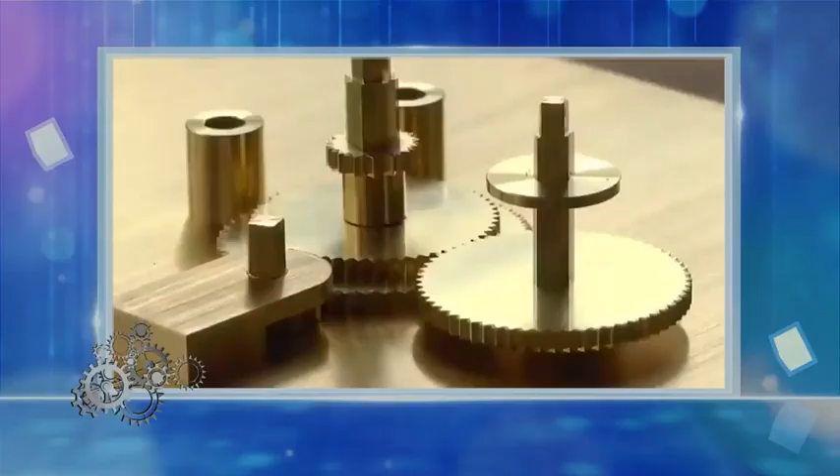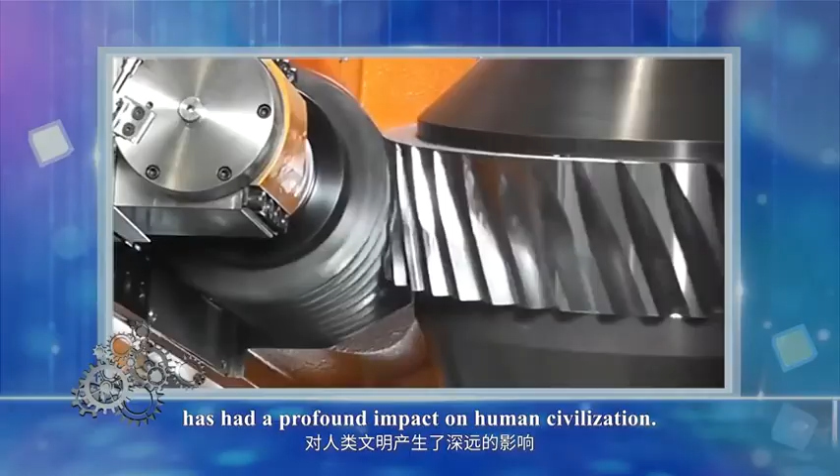Gears are one of the great inventions of humanity. The development of gear technology has had a profound impact on human civilization. The robotic arm on the core module of the China space station is a good helper for astronauts to work. This robotic arm is the most intelligent, difficult, and complex space intelligent manufacturing system in China.

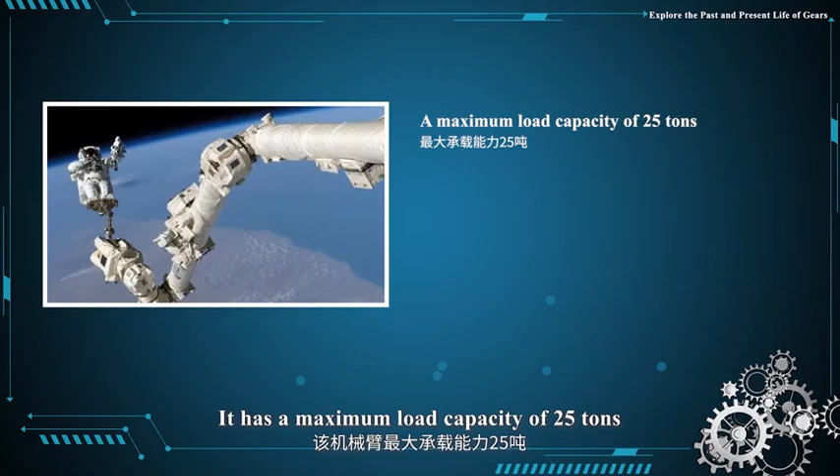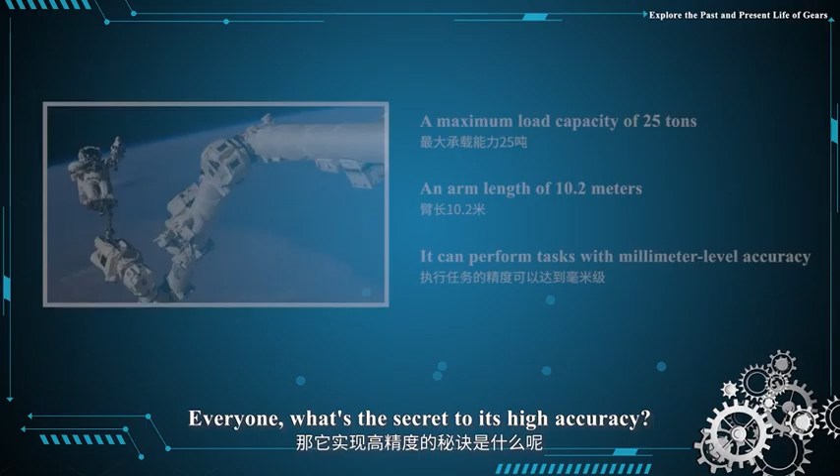What about the load capacity and motion accuracy of the robotic arm? That's a great question. It has a maximum load capacity of 25 tons and an arm length of 10.2 meters, but it can perform tasks with millimeter level accuracy. Everyone, what's the secret of its high accuracy? The most important reason is its core component, the reducer. The core part of a reducer is the gear.

In this class, we will explore the past and present life of gears. At the same time, we will also learn the representation of gear structural elements.

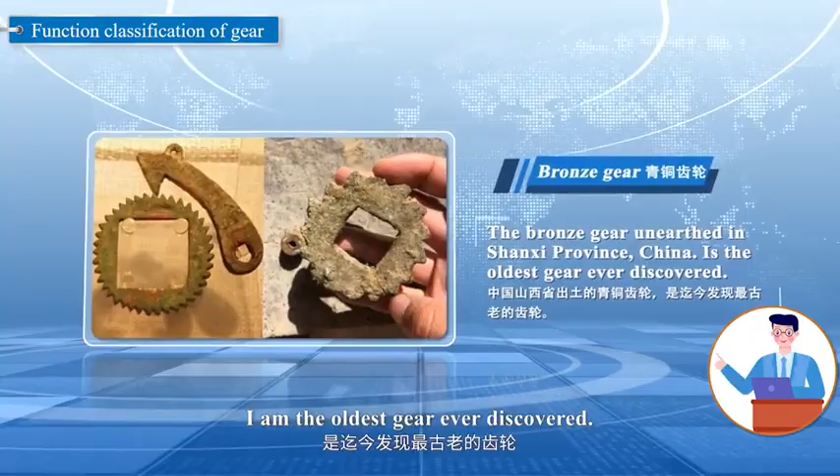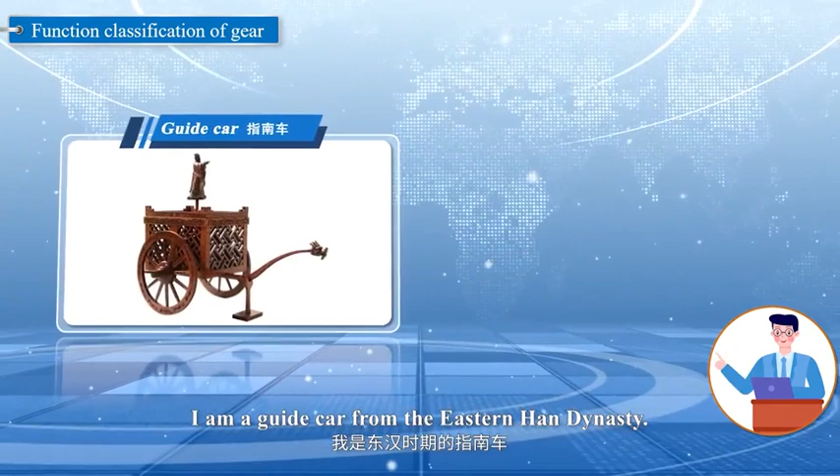Hello everyone, we are the past group of gears. I am a bronze gear unearthed in Shanxi province, China. I am the oldest gear ever discovered. I am a dragon bone water wheel from the Han Dynasty. I have greatly improved the efficiency of people's labor. I am a guide car from the Eastern Han Dynasty. I am an odometer. We are both mechanical devices with gear mechanisms as the core. Thank you for your sharing. Let us see the development of ancient Chinese gear technology and feel the broadness and depth of Chinese traditional culture.

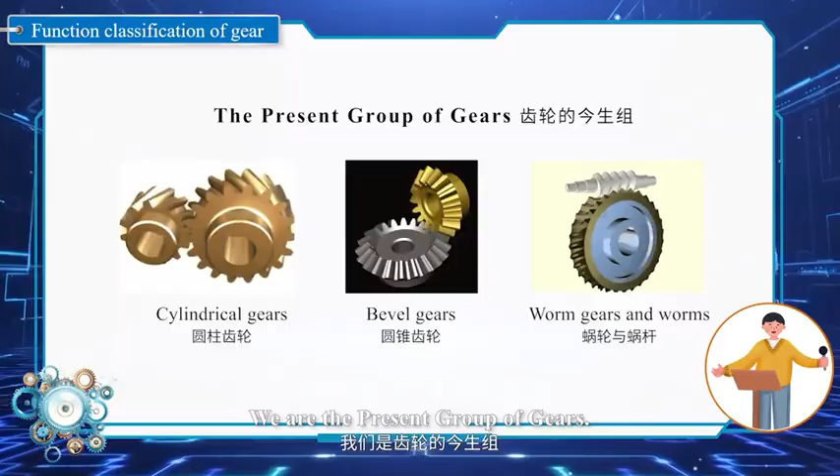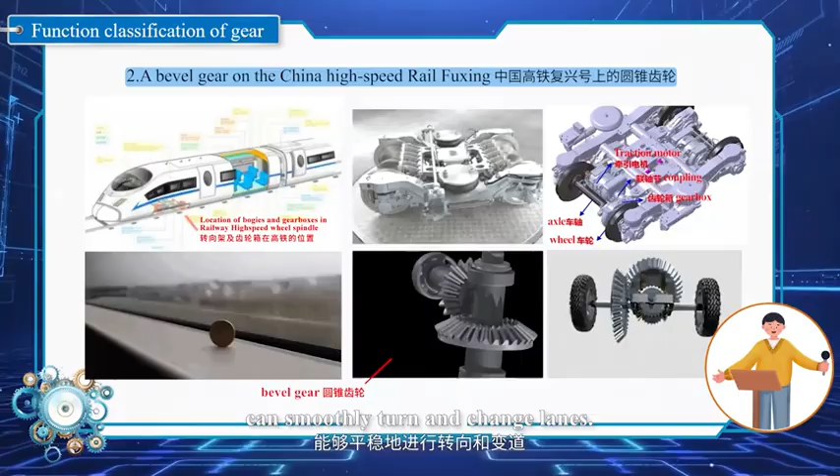We are the present group of gears. I am a cylindrical gear, and I ensure the accuracy and the efficiency of power transmission of the C919. I am a bevel gear on the China Railway high speed. I ensure that the trains can smoothly turn and change lanes. I am the worm gear and worm in China's large wind turbine generator set. I provide a guarantee for the stable operation of wind turbines. Thank you for your sharing. You have shown us that gears play a crucial role in the engineering and heavy equipment of a great country.

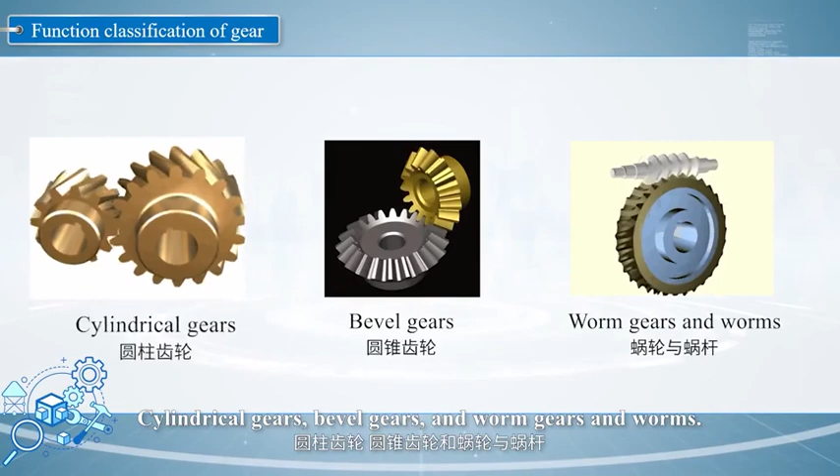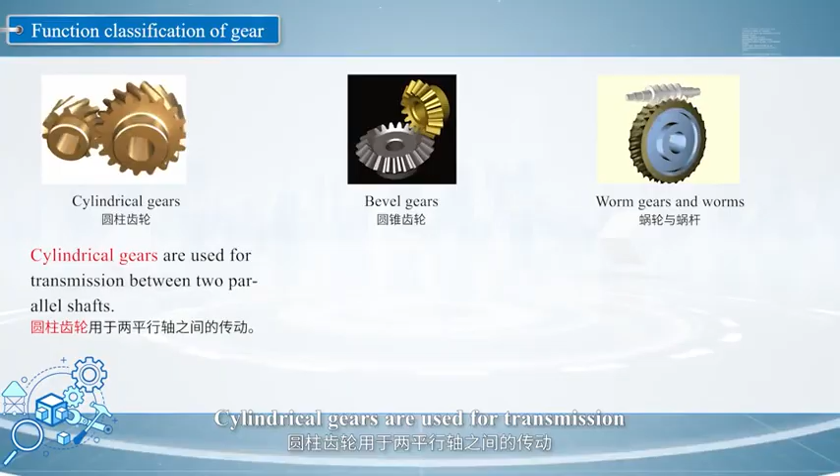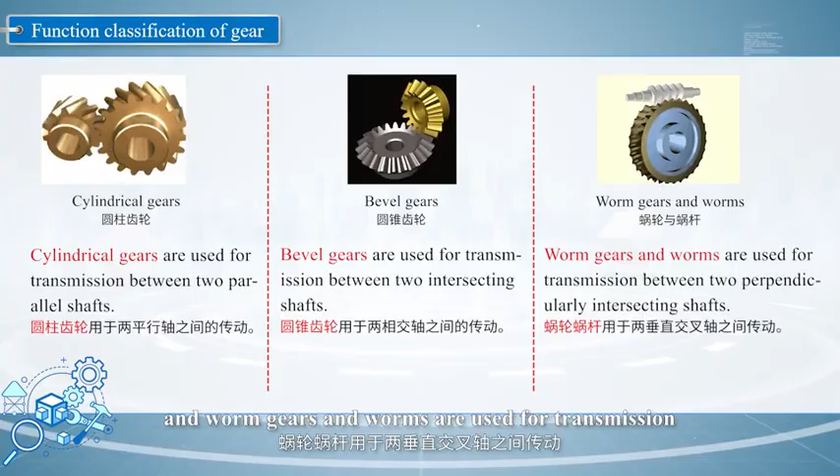Just now, we saw the three most common types of gears: cylindrical gears, bevel gears, and worm gears and worms. Can any of you tell us the difference between them? Cylindrical gears are used for transmission between two parallel shafts. Bevel gears are used for transmission between two intersecting shafts. And worm gears and worms are used for transmission between two perpendicularly crossing shafts. Well done! There are various types of gears in the robotic arm of our Tiangong space station.

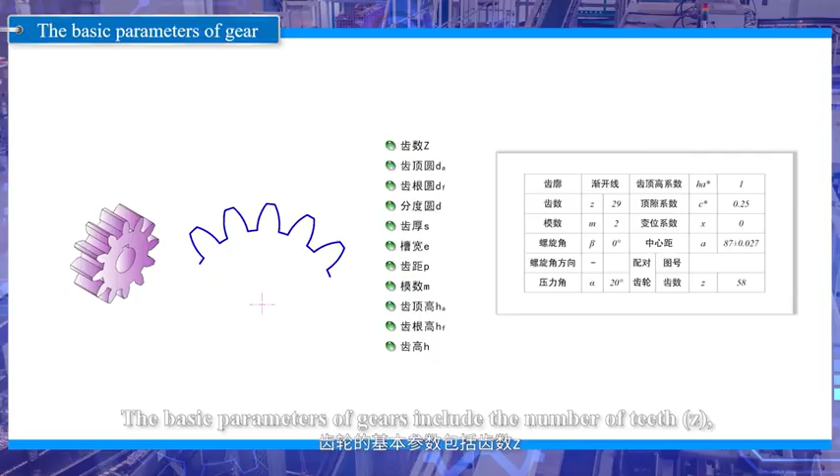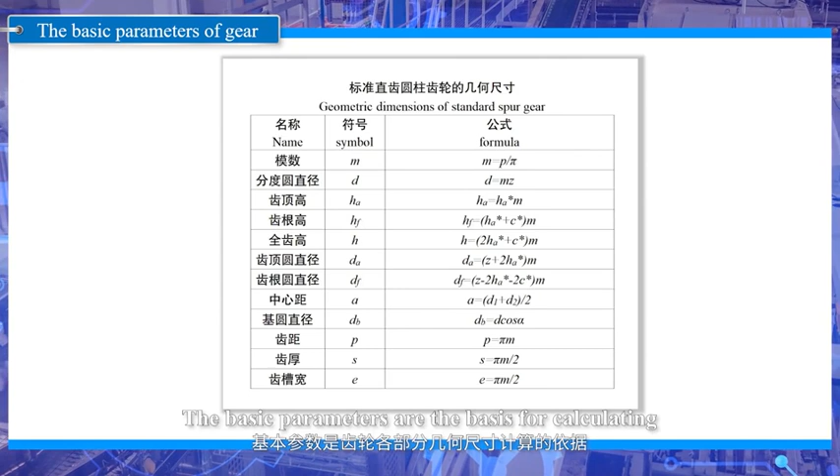Cylindrical gear transmission is the most common type. Taking the involute spur cylindrical gear as an example, I will introduce the basic parameters of gears. The basic parameters of gear include the number of teeth, module, pressure angle, tooth height coefficient, and clearance coefficient. The basic parameters are the basis for calculating the dimensions of each part of the gear. Among them, the module is the most basic parameter.

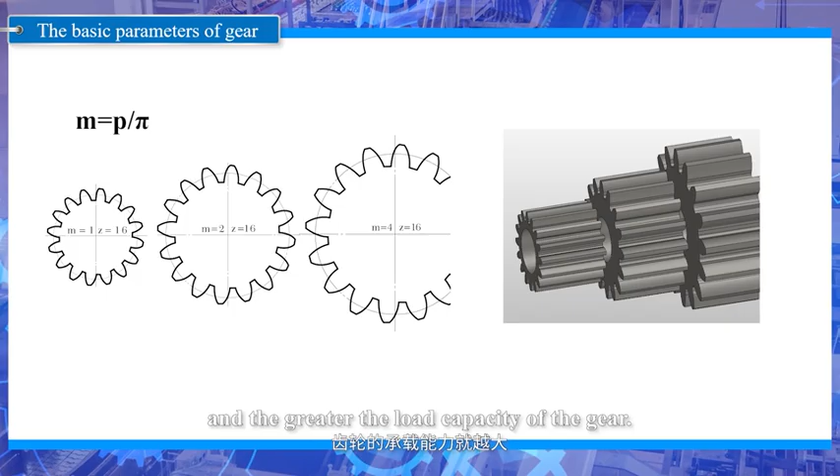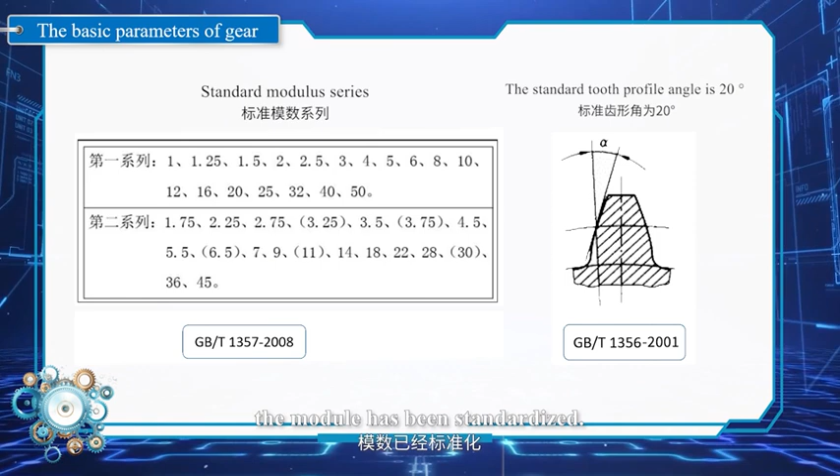What's the module? The module of a gear is a factor that determines the size of its teeth. The larger the module, the larger the teeth, and the greater the load capacity of the gear. For example, the module is like the size of a shoe. The larger the size, the larger the shoe. To facilitate design and manufacturing, the module has been standardized. What's the significance of standardization?

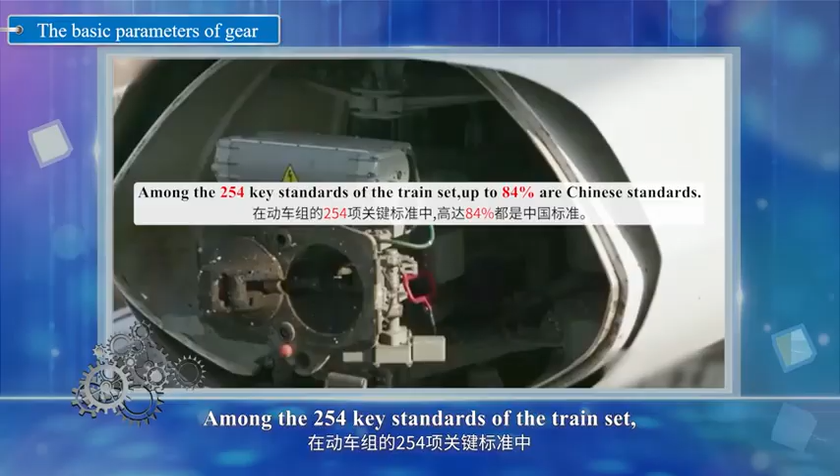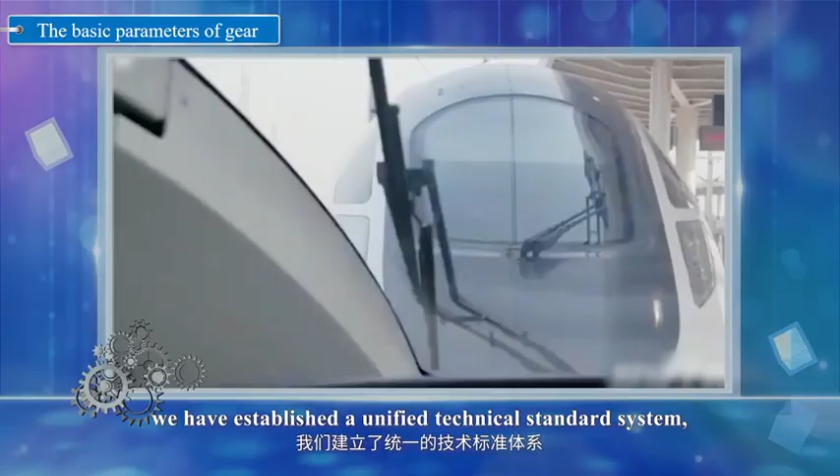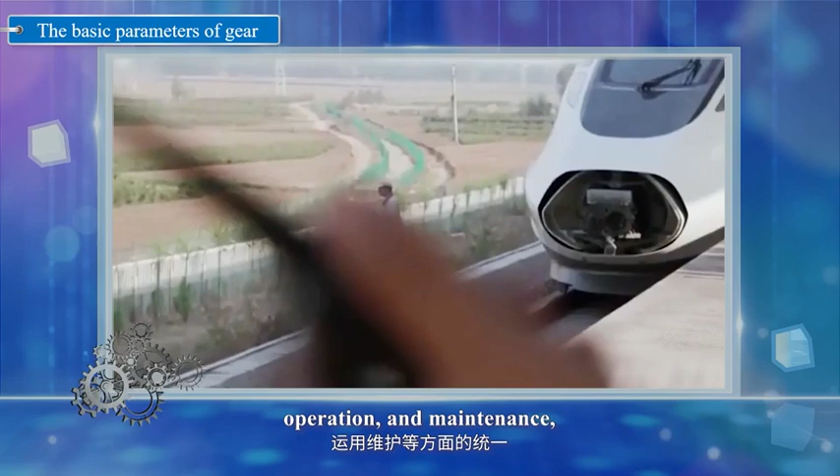This is the Chinese standard EMU Fuxing. This train widely adopts Chinese national standards. Among the 254 key standards of the train set, up to 84% are Chinese standards. For different models of train sets, we have established a unified technical standard system, thus achieving unity of function, operation, and maintenance, which not only improves efficiency but also reduces costs. This fully demonstrates the important role of standardization in promoting the development of high-speed rail.

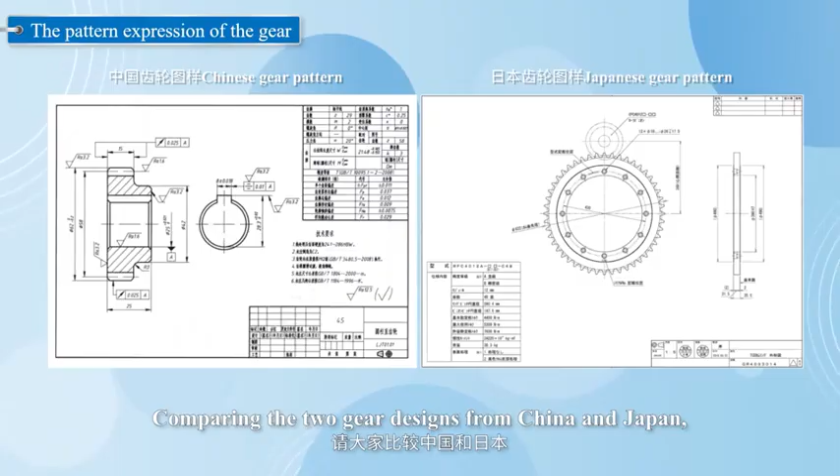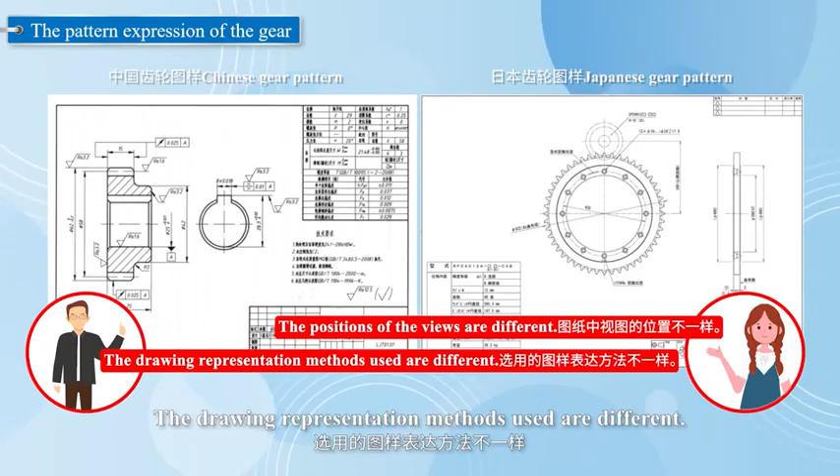How to clearly express gears in the design? Comparing the two gear designs from China and Japan, who can tell me the differences in the expression? The positions of the views are different. The drawing representation methods used are different. Well done. The left image uses the first angle projection. The right image uses the third angle projection. Most countries use the first angle projection, but the United States, Japan, Canada, and Australia use the third angle projection.

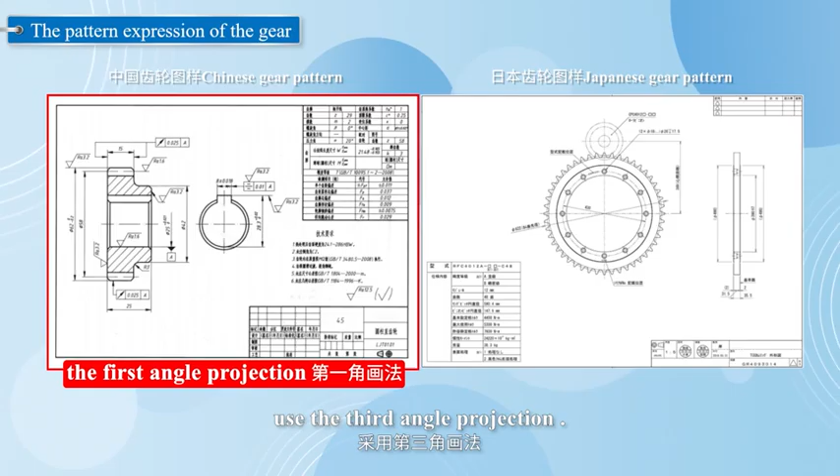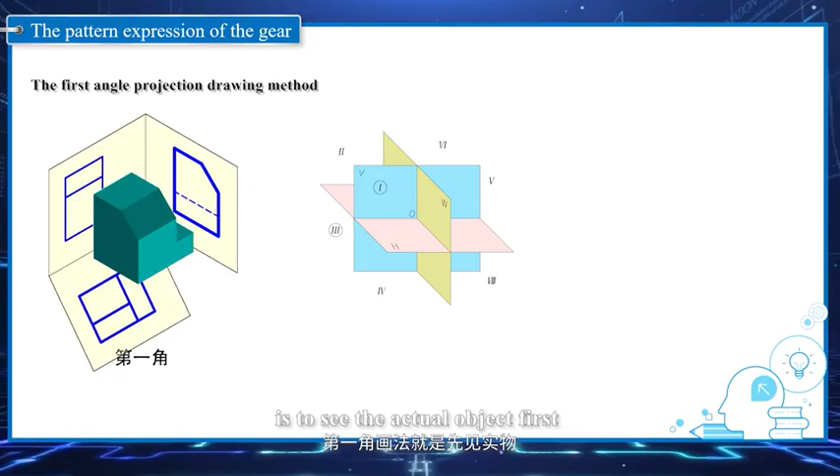I hope you understand the similarities and the differences in the technical standards of different countries. Then you can better promote international exchanges and international cooperation. So, what is the difference between the first angle projection and the third angle projection? Basically, the first angle projection drawing method is to see the actual object first and then the view. The third angle projection drawing method is to see the view first and then the actual object.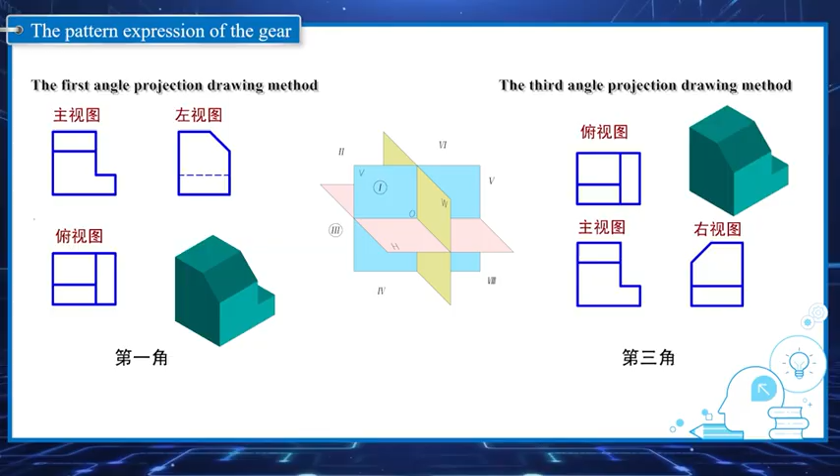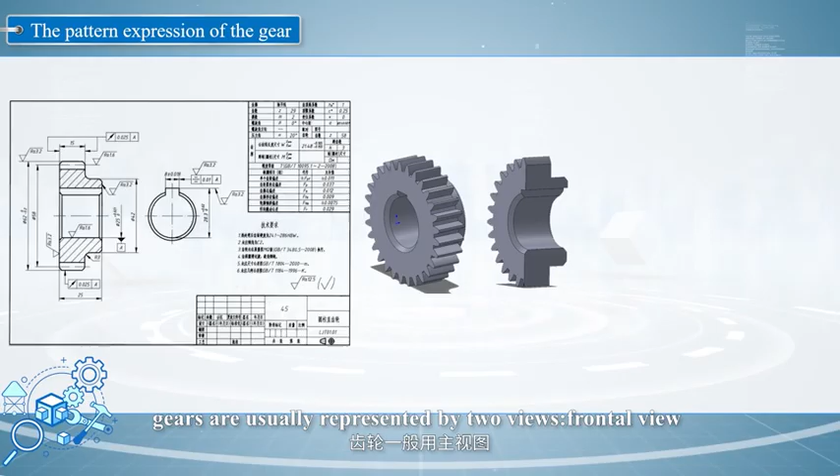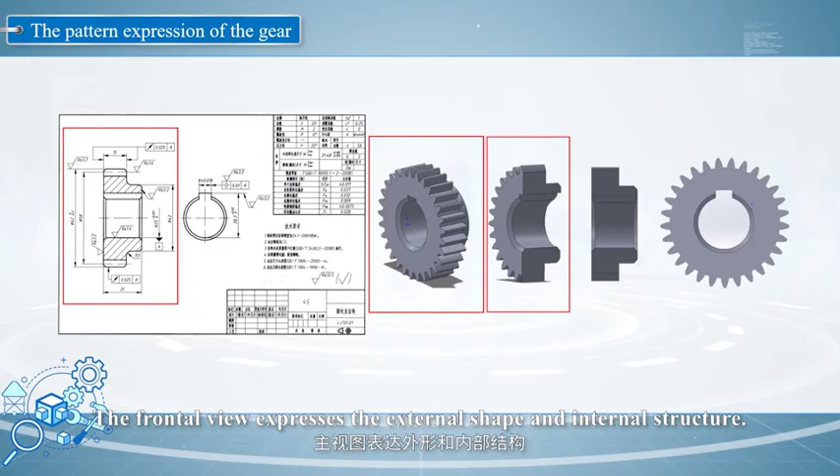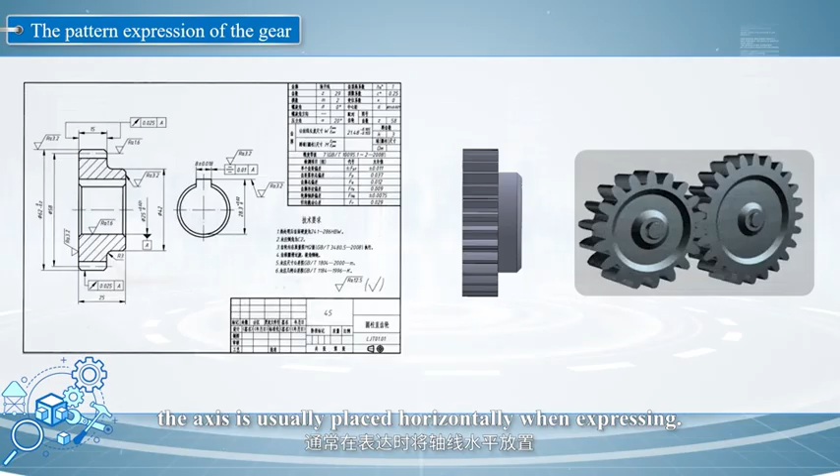Now, let's learn the expression in Chinese gear drawings. In the drawings, gears are usually represented by two views, the front view and the left side view or partial view. The front view expresses the external shape and the internal structure. The left side view expresses the shape of the gear hole and keyway. Because the basic structure of the gear is a rotating body, the axis is usually placed horizontally when expressing. It's convenient for workers to process and read the drawings.

There is a Chinese saying, "Convenience for others is convenience for oneself." Always thinking about others is a test of a person's character.

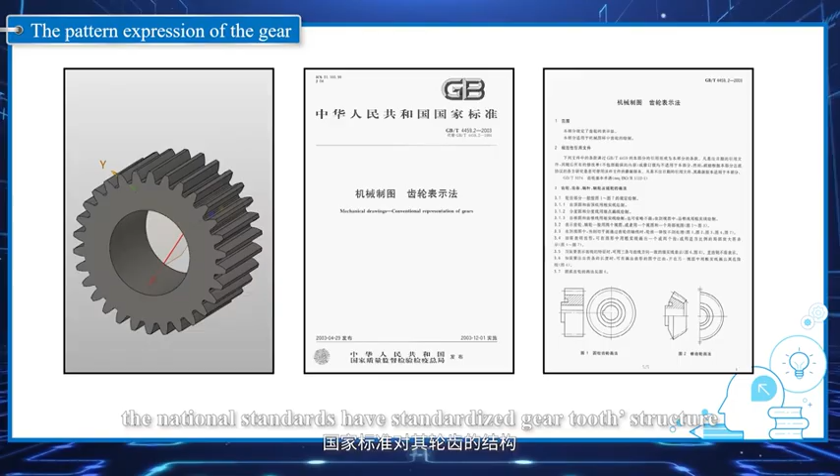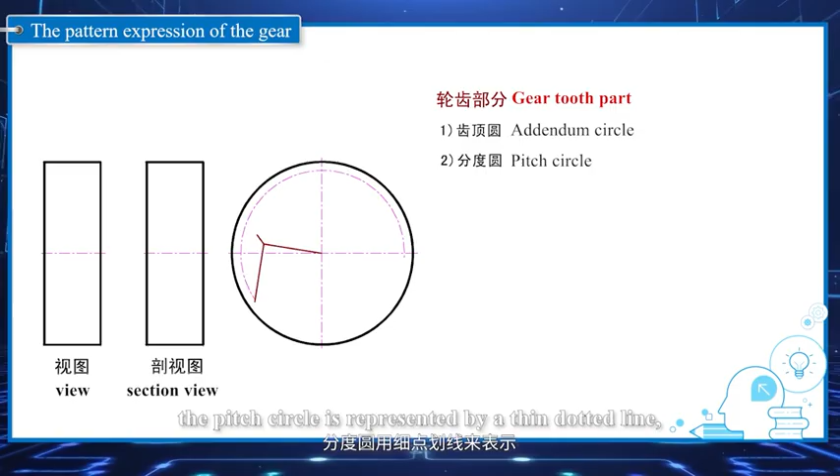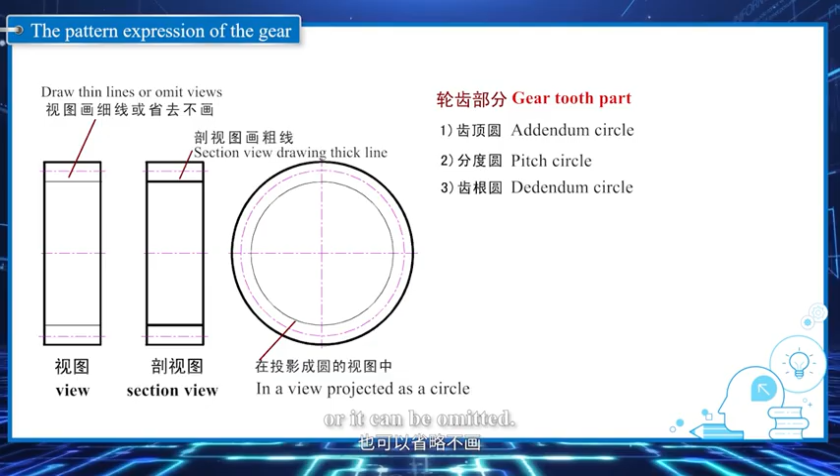Let's draw it now. Because gears are commonly used, the national standards have standardized gear teeth structure and dimensional parameters. We need to use specified drawing methods. The gear teeth part only needs to be represented by 3 circles. The addendum circle is represented by a thick solid line. The pitch circle is represented by a thin dash-dotted line, and the dedendum circle is represented by a thin solid line, or it can be omitted. You should strictly follow the provisions of national standards to draw gears.

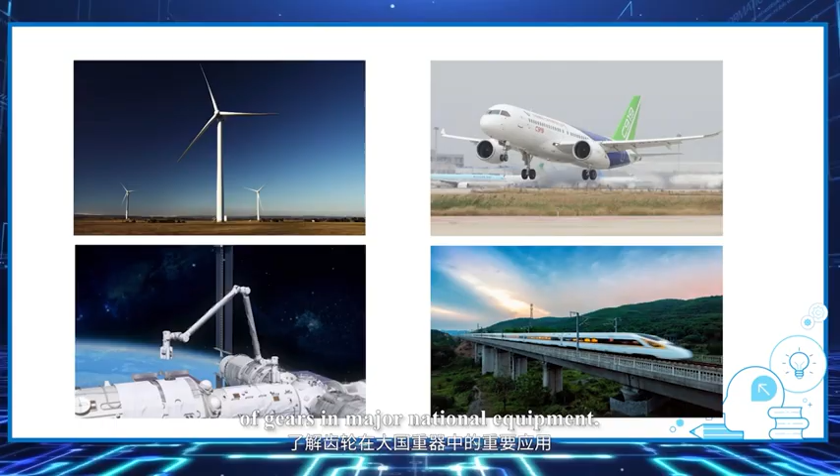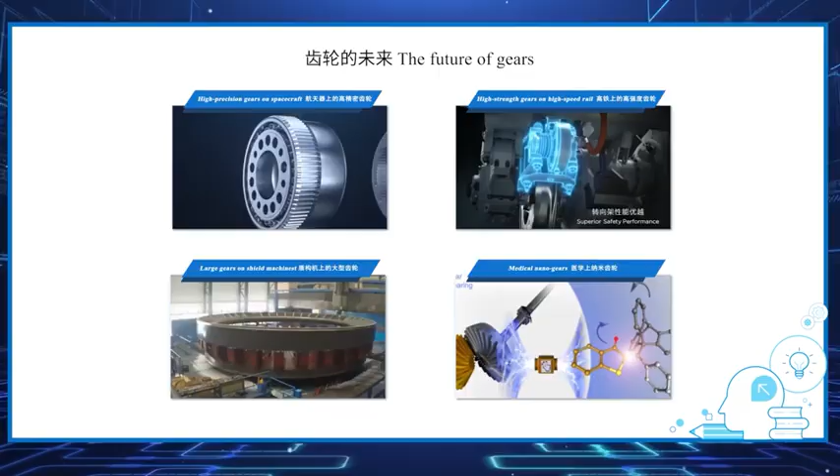In this micro lesson, you learned about the function, classification, and the drawing representation of gears. And you understood the important role of gears in major national equipment. We learned the drawing representation of gears, but the reducer's drawing of meshing gears is missing. Please complete the task of drawing the gear meshing assembly drawing after class. Looking to the future, gears will continue to write the legend of industrial civilization and empower manufacturing powers.